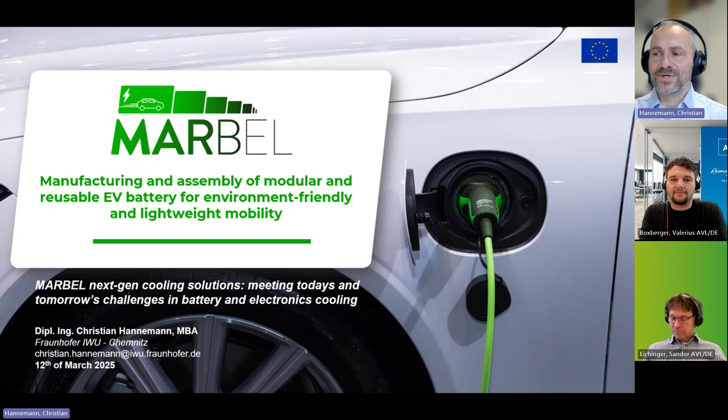Okay, Christian, let's start. Yeah, so we're heading off to the first presentation. It's about the next generation cooling solutions, meeting today's and tomorrow's challenges in battery and electronics cooling.

Just to give you a short impression about what we are going to see. First of all, we talk a little bit about the project itself, about MARBEL, the consortium, challenges, some objectives and impact, then some actual achievements, so all the achievements we have done so far, the next events, and some special challenges that appeared during the project period.

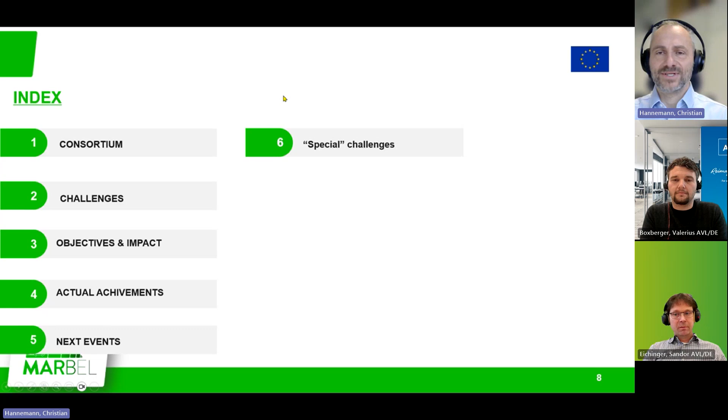So starting with an overview about MARBEL, I hope that is working. We've got a small video, so that you don't...

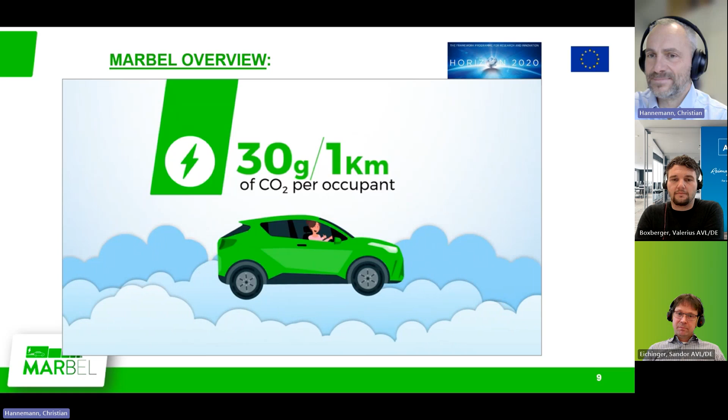The transport sector is the largest contributor to the EU greenhouse gas emissions, road transport being accountable for over 70%. According to the European Environment Agency, passenger vehicles can emit up to 182 grams of CO2 per occupant per kilometer, which can be cut to just 30 grams with the adoption of electric vehicles.

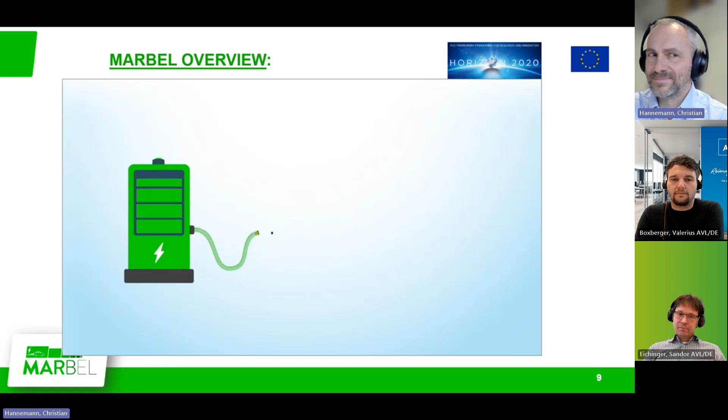To reduce transport emissions in line with the European Union's climate neutrality objectives, the MARBEL project is designing and developing innovative and competitive batteries with a reduced charging time by 25%, and a lifespan of 300,000 kilometers, almost doubling the life of current batteries.

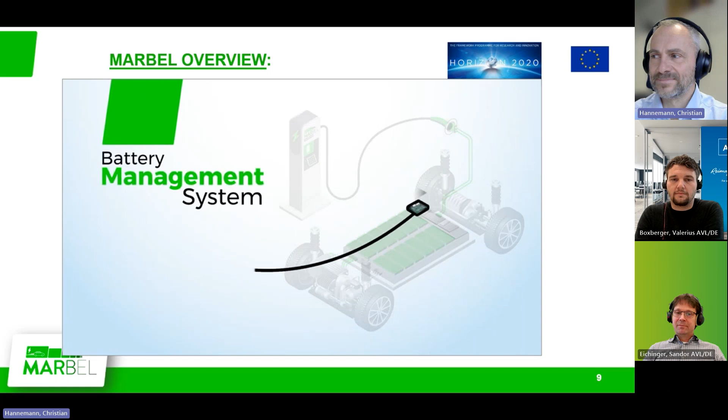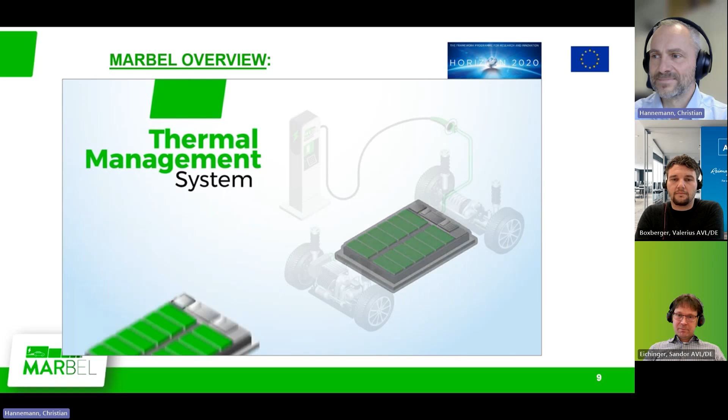The battery pack being developed includes an advanced battery management system, power electronic components, a thermal system to maintain cells at their ideal working temperature through a water-cooled battery, and an ultra-fast charging solution.

The batteries have an innovative design, the presence of recycled materials, and include circular economy approaches, ensuring that they are easy to dismantle, refurbish and repurpose for second life applications, all to reduce batteries' environmental impact and vehicle weight up to 20%. MARBEL, towards an environment-friendly and lightweight mobility.

This project has received funding from the European Union's Horizon 2020 Research and Innovation Programme.

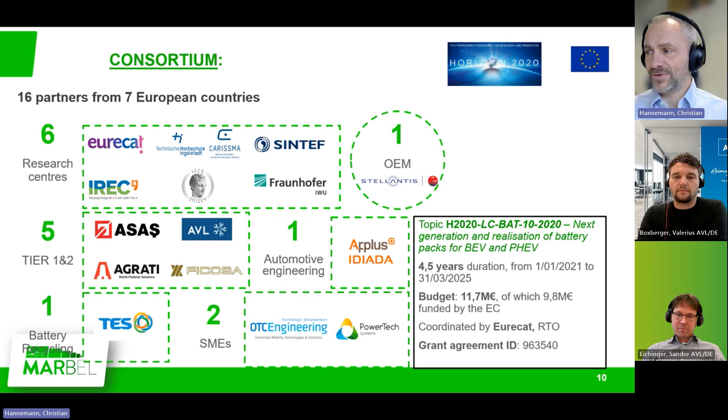Who is presenting today. We have 1 battery recycling company, 2 SMEs, 1 automotive engineering supplier, and 1 OEM, which is Stellantis. The project had a duration of 4.5 years, ending on the end of this month. It was led by Eurecat and had an overall budget of about 12 million euro. Yeah, it was funded by the Horizon 2020 EU funding.

And what are the challenges of this project?

What we have to do is accelerate the mass market of the BEV, and all electric vehicles, to get a more sustainable and efficient vehicle, and contribute to the EU policies meeting the emission targets of 55% by 2030. And how is that done?

Of course, we increase the energy density, reduce the weight of the whole structure of the battery pack, optimize the battery system's performance, extend the range we are allowed to travel, and decrease the charging time, as no one wants to stay on a petrol station very long or on a charging station very long.

We increase the battery lifespan and reduce time and costs as well for manufacturing as for maintenance. And there is a repurpose of second life application, so we're going to use it in other applications like scooters or whatever, and reduce the environmental impact.

Everything you see is compared to the Audi e-tron, which is registered here as well.

So how are the objectives and impact? We have 3 big areas. The first one is the design for circularity. So we are using modular and lightweight design, recycled alloys to create, for instance, the battery boxes. I'll come to that later on again. Weldless modules, also a point I will explain in a future presentation, and wireless communication.

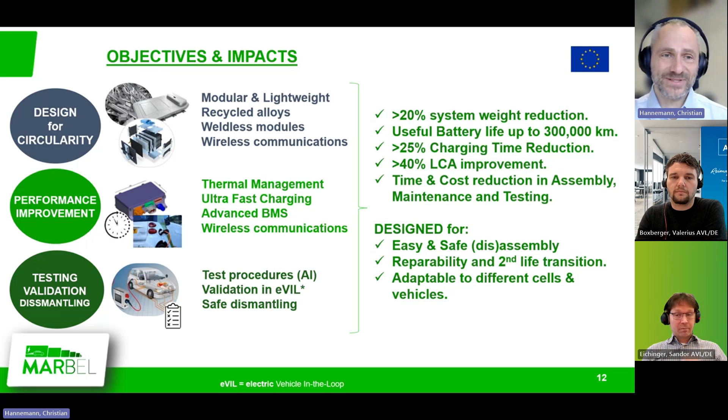And it's all designed for easy and safe assembly and disassembly. It's supposed to be repairable and allows a second life transition, and is adaptable. It is supposed to be adaptable for different cells and vehicles, so we are not connected to a certain OEM or car.

The first point, I explained it already, of those three is the achievement in lightweight design as sustainable housings. Yeah, you see we are using recycled aluminum alloys - I'll come to that later on again. Optimized aluminum extruded profiles I will show, and a modular design, so it's scalable. You can use it for smaller battery sizes and larger ones.

We have in this modular design a safe and easy disassembly and assembly. Most of those solutions use screwing instead of welding or gluing. We haven't got a welded bus bar, it's a screwed bus bar I will show later on, and it's flexible as well. So for easy dismantling, easy to handle.

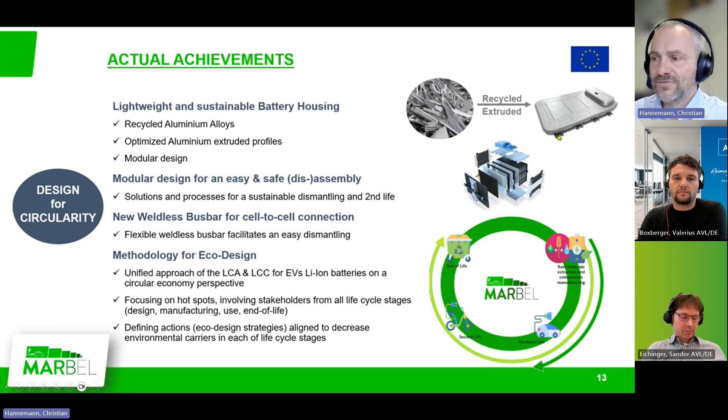And the methodology for eco-design, the approach has a unified approach for LCA and LCC, and the circular economy. It's focusing on the hotspots, involving not only the development, it's also involving all stakeholders from the beginning, so from the design phase, manufacturing, use, and end of life. And of course, there are implemented eco-design strategies as well.

Coming to this second box I showed in the beginning, some achievements have been done in ultra-fast charging strategies and enhanced thermal management. The thermal management is a special lecture we'll show during the whole presentation. So the ultra-fast charging control algorithm is a new one implemented. We take care of preparing the charging station for high power.

So we have a battery switching between 400 and 800 volts. We have demonstrators on both, ensuring the proper energy is coming into our battery pack. Then the enhanced thermal management will be shown in the next presentations - it's supposed to be an efficient cooling panel on top and bottom. And you will see that we use functional aluminum profiles for that, which have a mechanical job and include functionality of thermal management as well.

Also, we investigated some application of aluminum foam. In this case, I will explain why the foam in the end didn't appear in the final demonstrator, but that's also in a future presentation.

And in the battery management system, which is, I would say, the foundation for a second life application, we have flexible and modular BMS to adapt to a large variety, so we are not connected to one certain car or one OEM. It's meant to be also for other applications, containing a small cell manager and wireless communication, which reduces the wiring and this way, again, the weight.

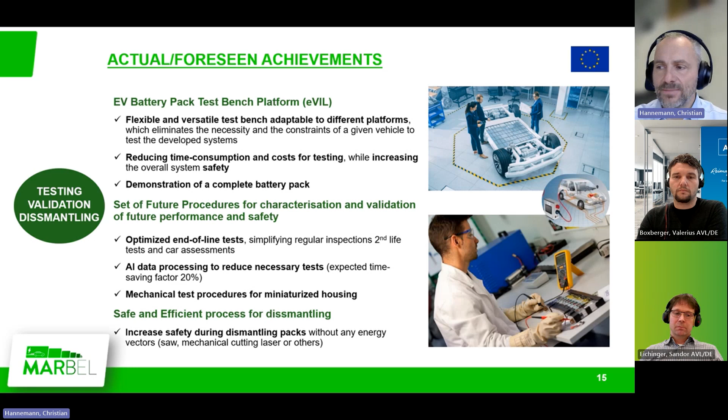In the testing, we have procedures for the characterization and validation of the performance and safety. We optimize the end-of-life tests for the inspection of a second life. The AI data processing reduces necessary tests, saving about 20% of time for those testing. Mechanical test procedures are done on a miniaturized housing. And as I said, for dismantling, we increase the safety during dismantling of packs without energy needed for sawing, mechanical cutting, laser, or others.

As I said, at the end of this month, the project will finally end.

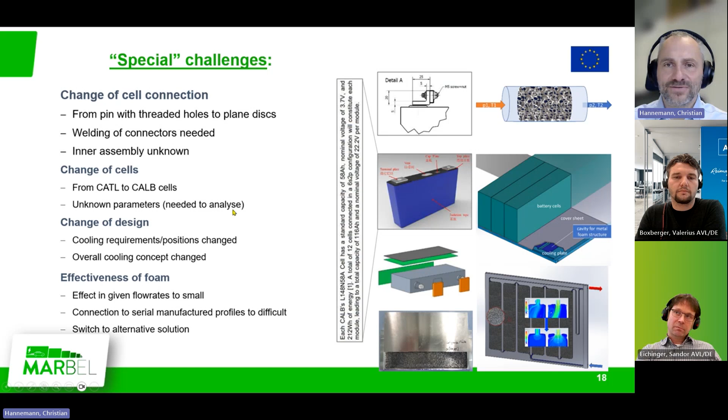I will show that later on, but you see on the right side already some different approaches. The first one was a cooling panel underneath the battery cells, and even in between those cells, there were cooling panels placed in the original design. Later on, with the new cells, there was not enough space for that, so we had to find other solutions. We changed the design and switched to an alternative solution. A new challenge, but we overcame those obstacles as well.

What do we need all those approaches for? The problem at the moment in electromobility and also in other electric systems is that the electrical power density of those systems is increasing. So we get more and more hotspots in the systems, and we have always limited space. We need new cooling solutions, as those cooling solutions actually limit what is possible to achieve, and therefore limit the maximum range and charging speed in electromobility.

And some of those further investigations will be shown in the next lectures, along with a brief mention of the combination of 4 EU-funded projects. The cluster COLLABAT, containing 4 projects working in battery development, includes Helios, Albatros, Liberty, and MARBEL.

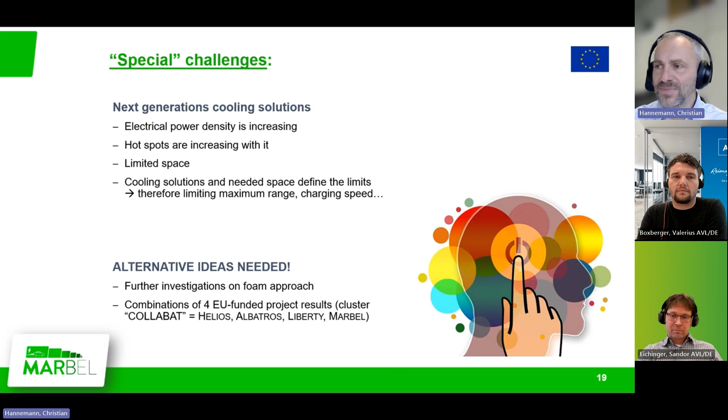So much for the introduction, I would hand over to Valerius. You show the slides on your own, or Sandor is showing the slides? Please share it from your side, we recognize the videos run a bit smoother this way. Yeah, I will, so it's your turn. I will share them. Okay, we see the slides.

Looks good. Everything we are showing now has a perspective of the thermal or the battery cooling system. I would like to start with a brief introduction about the objectives, not for the overall project, but especially for the battery cooling.

We had a lot of objectives, starting with the first one: to get a technical readiness level of about 7 to 8, so to have a demonstrator capable of letting the battery operate in certain required conditions.

With our focus, as the name already says, this is a highly integrated system, meaning we try to use materials or components and give them 2 functions. In this case, as Sandor will show later, we use structural aluminum profiles for mechanical aspects, to carry the battery and provide stiffness of the system, and also to use it for cooling application.

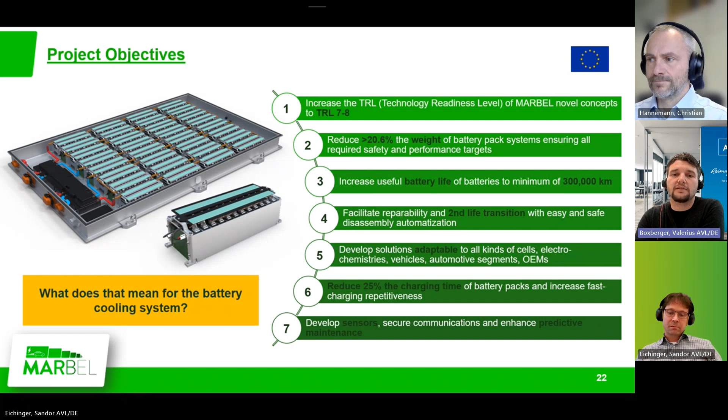Due to the change of cells, we really started from scratch, and there was a feasibility study, more details later. We investigated different kinds of cooling to properly design a system custom made just for this CALP cell, and this led us to two-sided cooling: there is the bottom cooling and the top cooling.

We focused more or less on these requirements, which we set up to have a maximum exhaust heat of 10 kilowatts at a cooling temperature of 60 degrees. We had a heat-up time of 15 minutes from 35 C to 60 C, and a cool-down at the same temperature level, from 60 C to 35, also for 15 minutes. We also wanted a limit on the pressure drop of the overall pressure system, to decrease the energy consumption of the pumps in the system.

Very important, especially for battery health, is to achieve at least the limits and ranges for the temperature spread within the cell, within the module, and also in the pack, which are mostly relevant for battery health and lifespan.

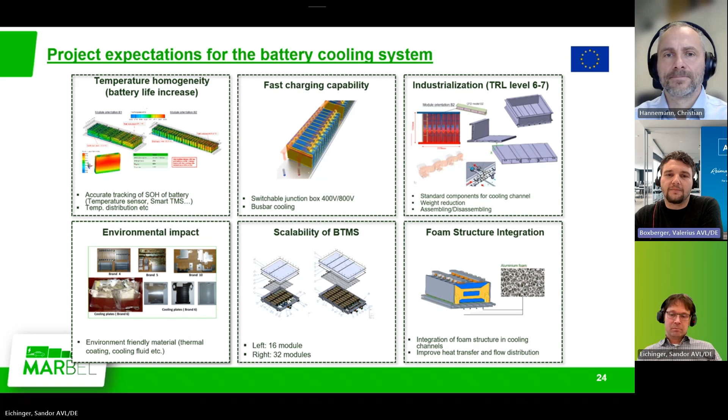Now I'm forwarding to Sandor, and Sandor will introduce in very deep detail the final outcome and the desired thermal battery cooling system.

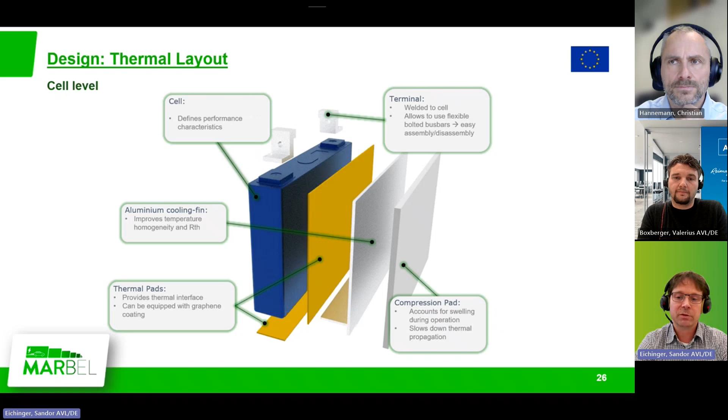And as a last part of the cell unit, we have a compression pad, which accounts for the swelling, and additionally it might slow down thermal propagation in case of thermal hazard. This small video shows the sequence of how it is assembled.

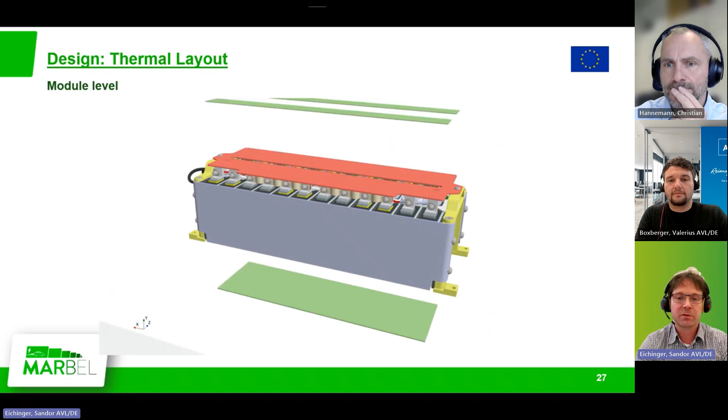On the next slide, I can go to the module level, also a bit animated. So the module consists of 12 cells, and then we apply a bottom profile, as already mentioned, which is filled with the coolant. There is a thermal pad which provides the connection. And we also have a top cooling rail which is responsible for eliminating the hotspots due to the bus bars.

Because during cycling or during fast charging, you can have quite hot bus bars on the top of the module, which then introduce again temperature inhomogeneity for the cell, and we wanted to eliminate that.

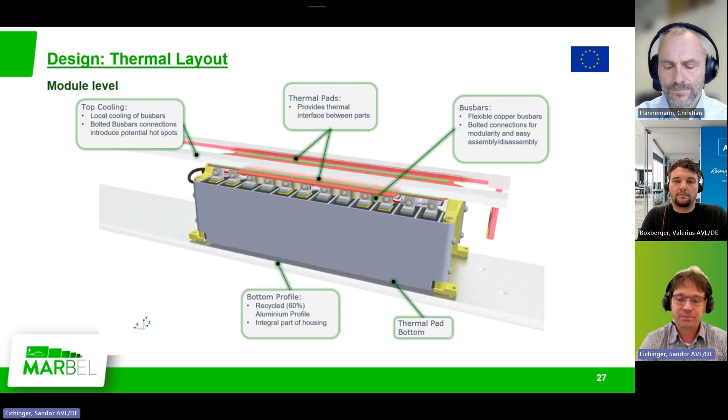In order to do that, we have a top cooling rail connected with thermal pads. In this picture, you can also see our CAD picture of the flexible bus bars, which are bolted to the cells. So this is our module, let's say.

As the next level, we have the pack. I'm showing now the big one with the 32 modules, so we have practically 8 rows with 4 modules, and we have a cooling distributor on one side of the pack, which is also very simply made because it's just simple piping. We have to ensure, of course, the flow distribution is even in each parallel row.

So we introduced some throttles in the piping, which was developed with the help of simulation and later on checked with physical testing in order to verify the diameters we derived. In that way we ensure that each parallel row has the same volume flow, and the only temperature difference we get is due to the fact that the modules are in series, so the module at the rear sees a higher coolant temperature. We checked this in simulation, and I will show it later. We are still below our targets regarding temperature differences.

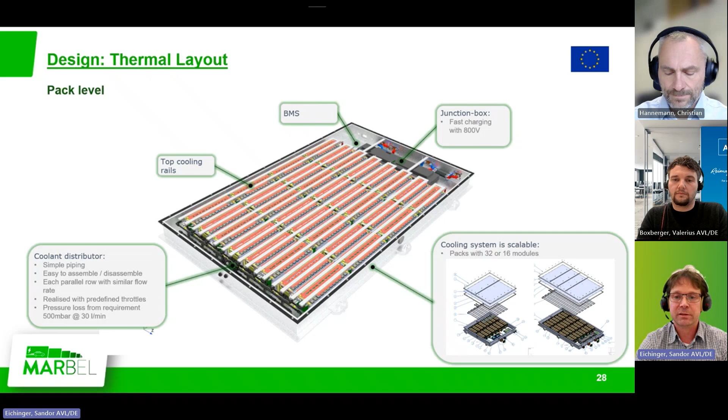The cooling system is also capable of cooling the power electronics, as you can see on the rear side of the pack, including the junction box, which is responsible for switching between 800 and 400 volts on the big pack.

For the cooling development, I'm showing now the position of the throttles and the volume flow distribution, which we determined with the help of simulation tools. You can see here the positioning of the throttles inside the system, and this development was also part of the project. In the next section I'm going to explain how we developed this, and now I'm just trying to summarize it for this part.

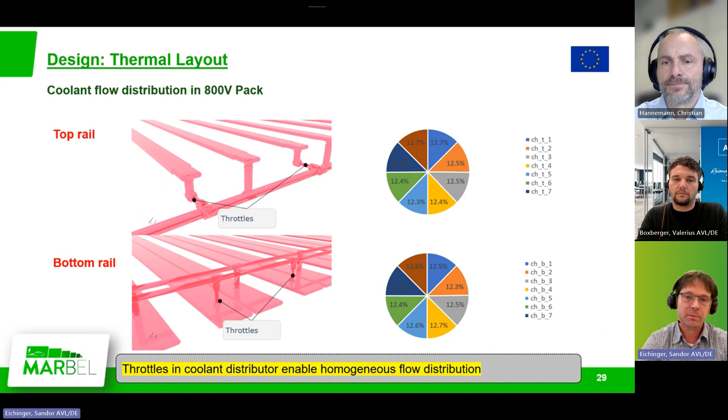Now I'm going to explain a little bit the intersection between hardware and software, because in this project we are also developing a battery thermal management system. This is a control logic responsible for the cooling and the strategy.

For that we need thermal sensors, and we position them in a smart way because we did simulations and we have seen where the hotspot of the cell is during fast charging or a charging cycle. We equipped the module with many thermocouples, so every cell has a thermocouple, and this information is then provided to the BMS, and at the end the BMS provides this to the BTMS.

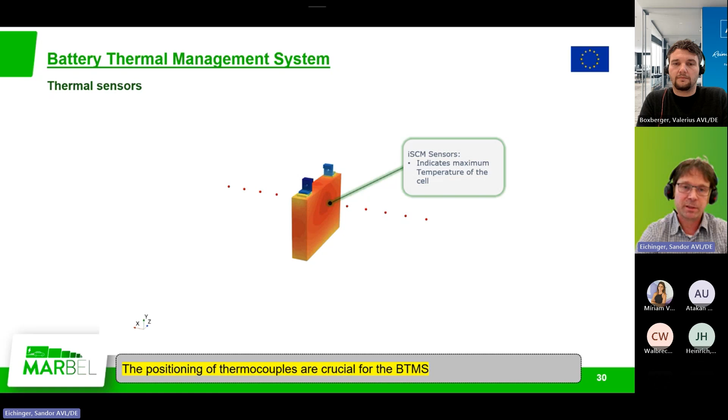So we can develop our strategy for the cooling based on that information. Another, let's say, very simple explanation of our BTMS strategy: we have the hardware on the left hand side, we have the BMS, and the BMS at the end provides information about the actual current and the temperature vector to the BTMS, and some other information which is not listed here but I have a slide for in this presentation. All this information is then processed in the BTMS, and the BTMS provides a target volume flow and a target inlet temperature for the coolant which should come into the cooling package.

In this project we don't have a vehicle, so we were planning to do it with a conditioning unit in a test bench. This conditioning unit can provide whatever temperature and volume flow, and this is also information for the BTMS, so this kind of hysteresis can be considered.

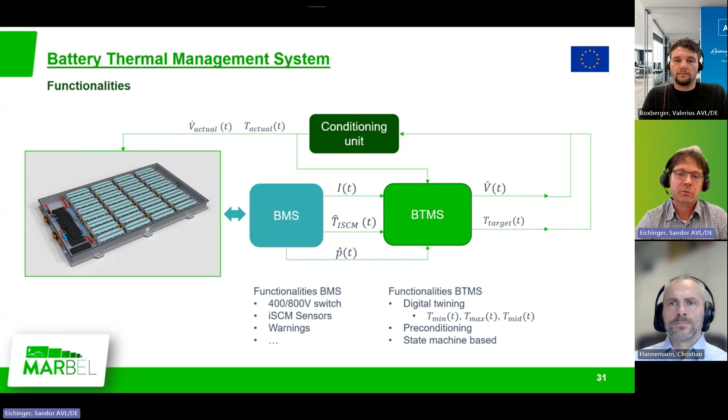On the other hand, the BTMS is just a state machine based algorithm, so not exactly state of the art, but also capable of preconditioning. In this project, though, we didn't have the possibility to develop preconditioning models. It's just that the BTMS has a different approach accordingly if we know we are in a preconditioning state, but providing that information of when we are in preconditioning would be the scope of a different project.

With that, I can try to summarize at least the definition of the cooling system layout, the achievements we tried to reach, based on the previously explained challenges, requirements and targets of the project. So we have a cooling system which has good temperature homogeneity, which I will show in the second part, and the thermal resistance is also close to the target.

We successfully implemented the cooling system, which is easy to assemble and disassemble using bolted connections for the bus bars. It's very simple piping with a modular approach, which was previously defined. The system is scalable for bigger and smaller packs. We have smartly placed sensors as well as a control algorithm for the thermal management system, which is also capable of digital twinning and preconditioning if needed. So with this, I'm done with the description of the cooling system layout. If you have questions, write them in the chat.

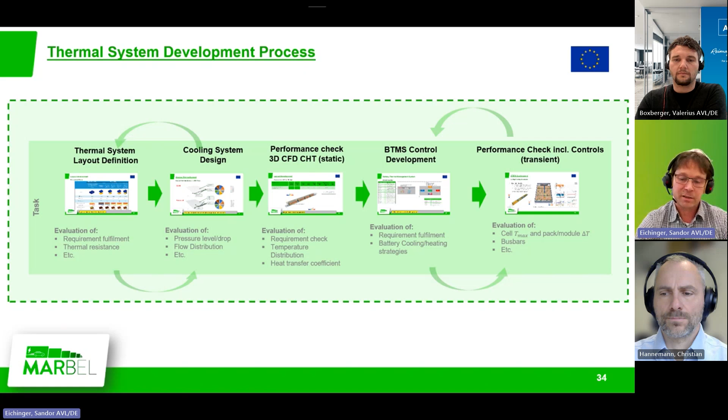Now I'm talking about the layout definition phase, the first small rectangle. As I said, we were considering different concepts and studying them in more detail. As you can see on the right-hand side, there's a small summary of different cooling concepts. Not everything is included here, but this is roughly what we investigated.

So immersion cooling, liquid cooling, we had some state-of-the-art where the cooling plate is on the bottom or between the cells with some aluminum fins connected to the bottom, or we have top and bottom cooling as well. We tried out different techniques here.

We also wanted to use at this phase some kind of heat pipe technology, applied between the cells. With the heat pipe, you can have very good heat conduction in a certain temperature range, which would be very good for the thermal system. But during the development process, due to different challenges, some very good techniques can fall out because of the price, environmental friendliness, and other aspects. So this was actually the case here.

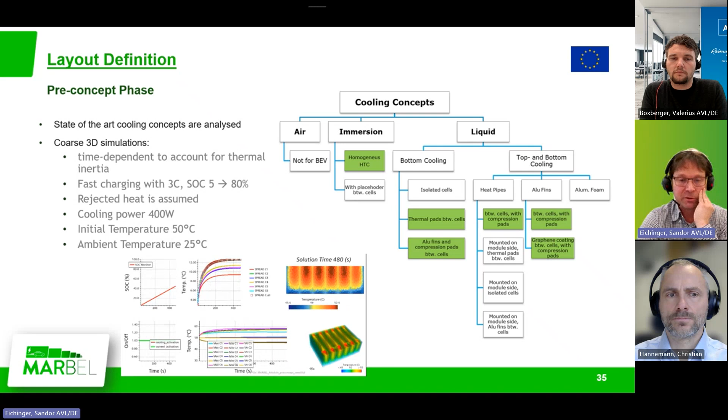So this would be very good, but it would be very expensive—problematic from many aspects. So at the end, we have already a quite good solution with aluminum fins between the cells, and that's a good introduction to the next slide.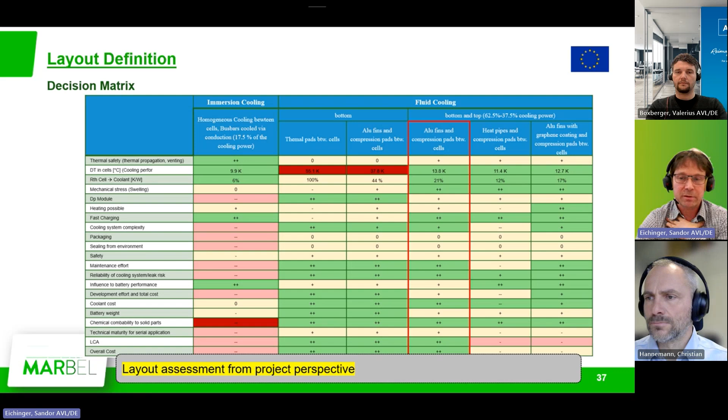But of course, the next step, as I said, is an iterative process. We also consider the complete pack. The flow distribution has to be considered, because as you go from cell level to module level and then to the pack level, you have to develop the corresponding parts. We did it in a simple manner, using different diameters for the different rows introduced in the cooling distributor.

Which then at the end results in a quite even flow distribution, and also the pressure loss fulfills our targets and requirements. So in this very simple manner, we can ensure that the temperature homogeneity in the pack is okay.

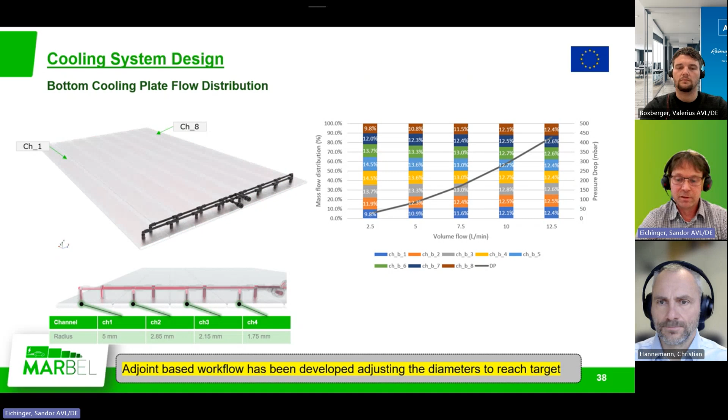And for that, I mentioned that we developed, for example, an automatic adjoint-based method to derive these diameters. This is also an interesting method we tried out in this project, and it was a successful method to find those diameters instead of a manual trial and error method.

Okay, then I'm going to switch now to the performance check. That was more or less the third rectangle in the process. This is again a very detailed 3D simulation with fluid and solid considered, but it's still based on some assumptions. We tried to use a load case which represents a kind of worst case, so we have a heat rejection in the cell.

At this phase, maybe we already have some information from cell characterization. We can have some assumption about the rejected heat in the cell, and we took something like a middle value during fast charging, about 10 watts. We also considered ohmic heating of the bus bars, and in the simulation tool you can model it, including thermal resistances due to bolted connections and electrical resistances as well. All these things give you a very accurate representation of the temperature field.

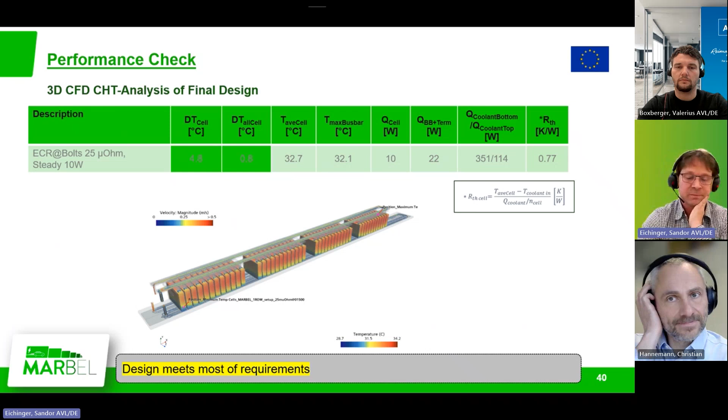So we were satisfied with this, and then we go to the next rectangle, which is the development of the BTMS. As mentioned in the previous presentation, we have some inputs from the battery. Through the BMS, we get temperature vectors, electricity, and so on. I made a complete list of the input signals and output signals of our BTMS. I'm not going to explain all of that, but I want to mention that we have many different variables which define the state of the battery.

We use the coolant inlet temperature, the actual coolant inlet temperature, also as an input. This accounts for the hysteresis due to the conditioning unit, or in case of a vehicle, where your thermal management system doesn't always provide exactly what you want. On the right hand side, you have the target volume flow and also the target temperature, and we also have a heating request in case of heating up the battery.

So this is the input and output description of the BTMS at this stage, and this enables a safe and more or less effective operation.

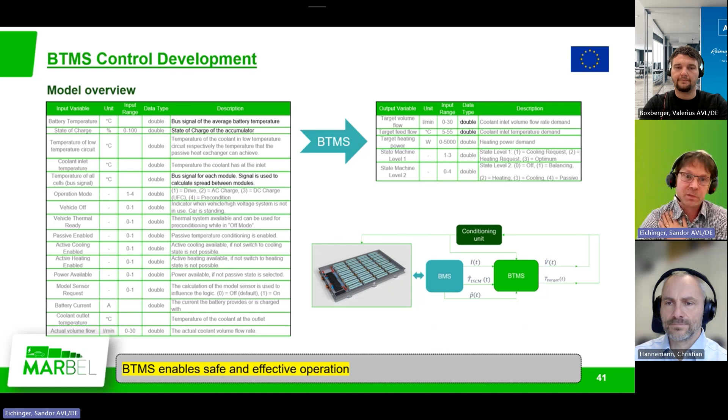As I said, the last rectangle in that development process was this one, with a high fidelity simulation with performance check.

So this is, let's say, a complex battery simulation with a cell model which is based on some electrochemical model. We integrated this into our simulation tool with the help of FMUs. An FMU is a workaround to do co-simulations between different systems, so our 3D simulation can communicate in that way with a

P2D electrochemical cell model. We did the same with the BTMS, as you have seen before, that our BTMS can also be exported as an FMU, and then in the simulation it's easy to implement everything and put it together, and we can have a complete simulation.

And I think, maybe let me add one information: it's an advantage that we are able to also use control functions from the 1D model, the BMS function, and integrate it into our overall simulation.

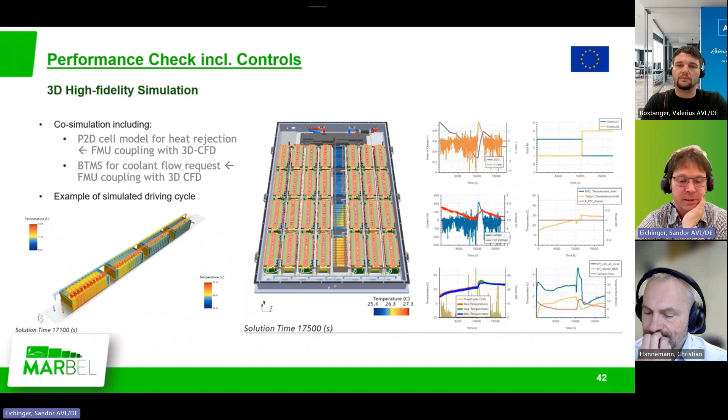Yes, I wanted to explain the next slide as well, how we used this kind of simulation to improve our BTMS, because it was a part. We used this high fidelity simulation in order to train our very simple model, which then provides us the temperatures in different locations.

And also it's possible to define local minimum and maximum. As an example, you can see a driving cycle on the left-hand side, which consists of intensive driving and some charging. So you start with a full battery, you drive it empty on the highway, and then

you just, let's say, charge it again. And for that, what we did is we took only one sensor of the complete module, and we can train the model, and it is able to provide us, for example, a temperature value on the bottom of the cells.

straight line is the simulated value from the 3D model, and the dotted line is from the fast running model, and they are quite well capturing each other. The agreement is quite good. The same applies for the middle temperature.

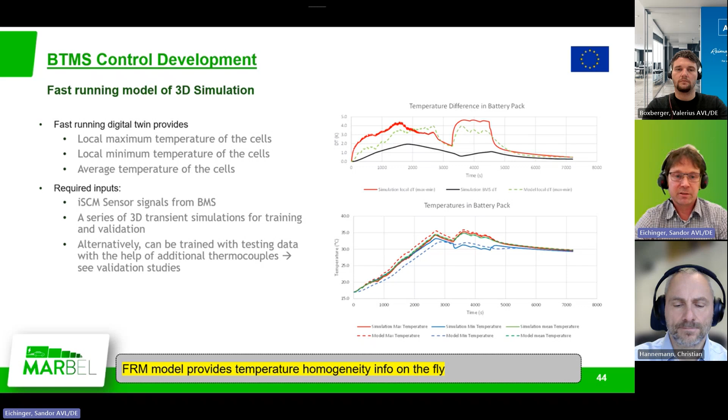So this is more or less my presentation. The last slide is a summary. We applied the virtual development process with very few validation studies, and we tried to overcome the project challenges with more or less success. We developed the BTMS control algorithm, which is capable of digital twinning on the fly.

There are still some points it would be nice to continue in a longer project period. It should be done at some point: an extensive validation of the BTMS with measurement results, which is being produced right now at some other institute, maybe at this very moment. The last point was also already mentioned before.

If you want more information about the MARBEL project and the battery pack in a more holistic manner, it's strongly recommended to join our final event. So with that, I'm done.

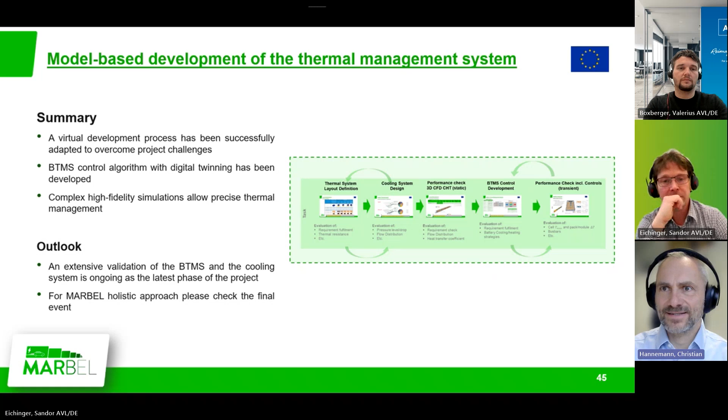Right. So I think that is your sharing, and I'm switching to the next part. I hope you can see the slide. We come to the next point. As I said, we are a bit ahead of schedule, and we will skip the coffee break. I hope it's not that boring - the next lecture is not that boring that you'd jump over and go to the coffee break anyway.

I'm talking about the industrialization of battery systems from development to mass production. There are just certain points I can show here, because it's a long step, and industrialization is a point you always look at for the future. But we are developing a new battery system, so we are not yet on industrial scale, and we are definitely aware of that. We have a TRL level that is supposed to be between 6 and 7, and we will stick to that, not coming to the final version of an OEM application.

So the talk is separated into some approaches. I want to show something about the material, the processing, and other approaches that might not have come into the system yet. Starting with a slide you might remember from the first presentation.

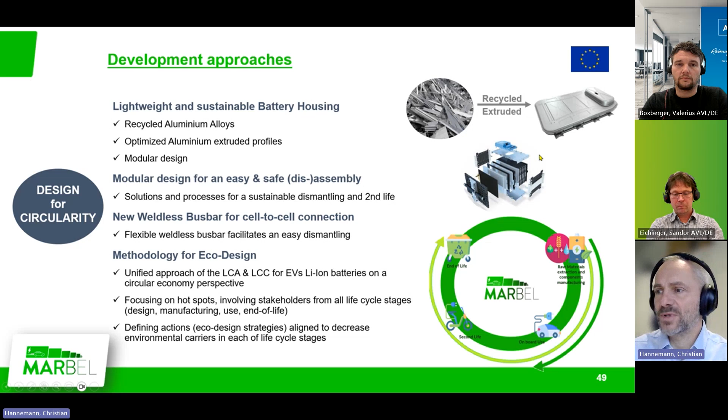By this modularity, there's nothing glued or welded. And you heard already, we avoided the immersion cooling in the end, because it's supposed to be repairable and easy and safe for assembly and disassembly. All those points have been mentioned already, so I'll go a bit deeper in detail.

For the material side of the battery housing, we used an aluminum housing realized by extruded profiles. The material was post-consumer scrap - you see on the left - and it had to be collected, shredded, identified by, for instance, LIBS, and in the end molten into the first ingots. Those were cast and remolten, chill cast into extrusion billets, and finally extruded. In the end, if you want a certain structure, it might be deformed as well.

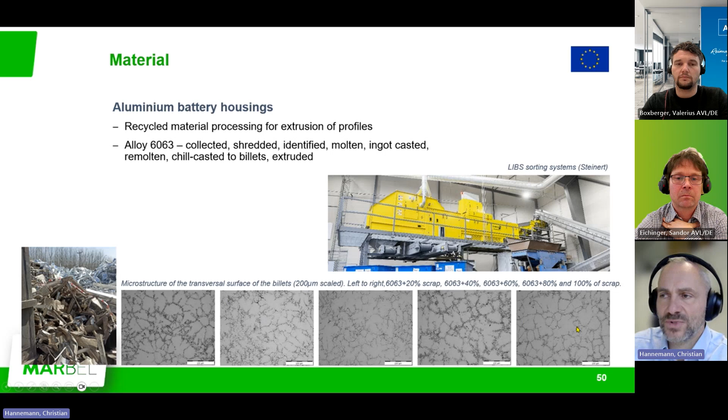On the lower side of the slide, you see some microstructures with different contents of scrap, combined with virgin material of 6063 alloy. We started with 20% scrap and increased it step by step up to 100%. The results showed that extrudability remained - it was extrudable in all ways.

In series manufacturing, you're dealing with much more material. If we had recognized early on that the scrap content wasn't working out the right way, we could have skipped that and improved it at laboratory scale beforehand. Coming to this large scale...

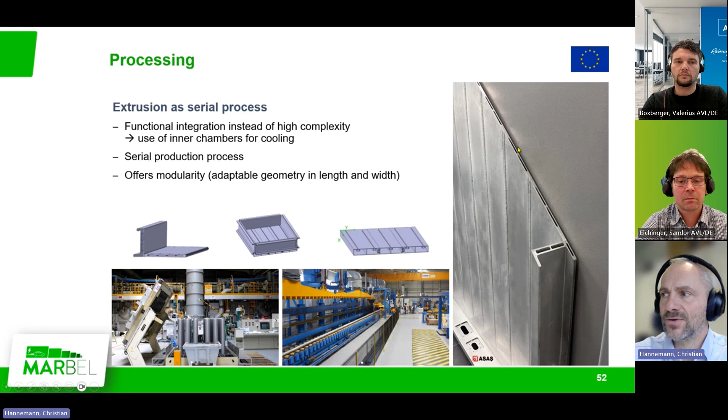That's about the assembly. A prototypical assembly usually is connected with manual welding. In our case, we established automated welding by robots. You see the battery box, we have some weld beads on the side walls, and of course we have to interconnect all the floor panels as well.

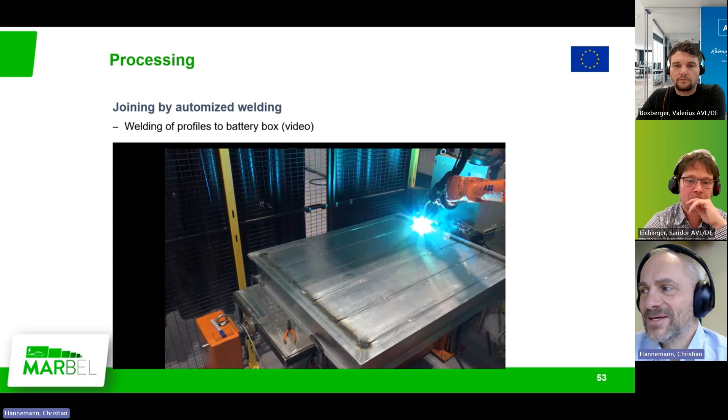This way also creates parallel cooling of the battery cells. In the lower right corner there's monitoring of the welding process, continuously supervised, and you see the weld beads look very homogeneous and nice. Now the people have to speed up a bit, and sometimes you see welding of only part of the weld bead's overall length. That's the strategy to avoid tensions during the assembling process.

So now the inside is actually welded, and it has to be a sealed system in the end - in one case because of the cooling, and in the other case to protect it from environmental influences.

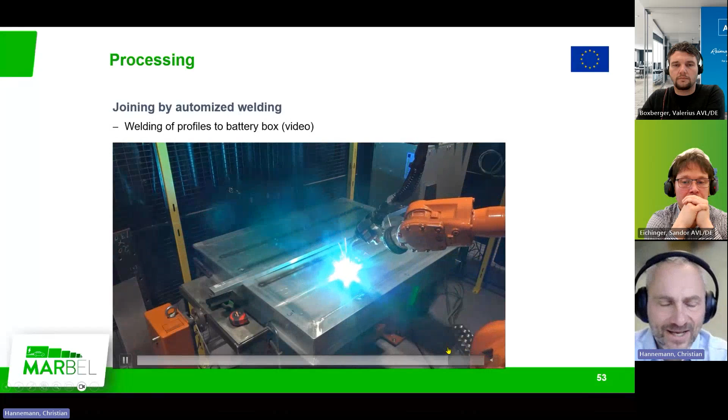I'm going to speed that up a bit. Again you see the melt bath of the welding process and the supervision of that. If you have further questions, I'm sure the colleagues and project partners from SINTEF in Norway are happy to answer your questions if you join the final presentation at the final event next week.

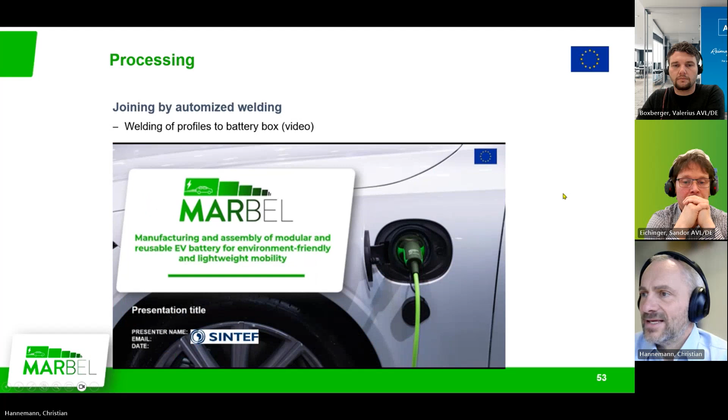We have already seen some slides and videos or animations of the assembling process, and this is a process I found rather interesting as well. For me it was the first time that I actually attended such an assembling process. To give you an impression of how it looks, here's a video of the assembling process realized by AVL Italy. Antonio is explaining it.

Is the voice working? No, no sound. One second. I will just shortly unshare my screen and share again. So jump back a little bit. And we try it again. Now working? No. That's strange, it should work. So maybe one of you is able to explain a little bit about it?

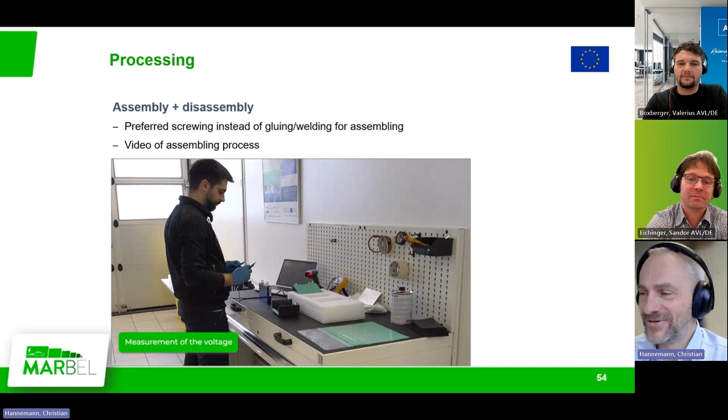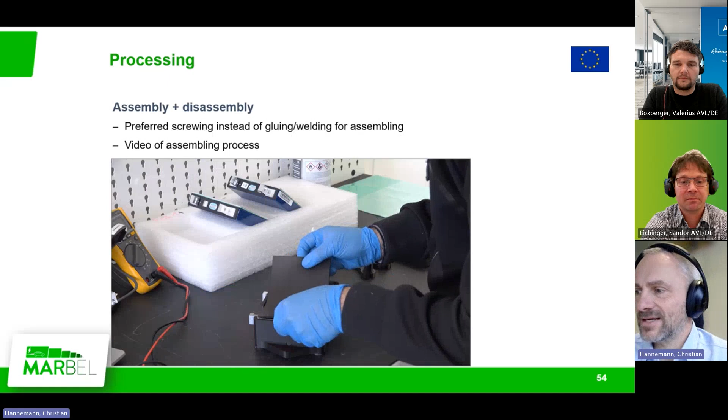In the end, most of it is already shown in the pictures, so if I say anything wrong just let me know. First of all, the preparation of the cells. Here you see the thermal pads adapted to the cell, the compression pads, and the sensors for the thermal parameters. We had a question about this in the chat before - the material is shown. Now 6 cells are actually already assembled.

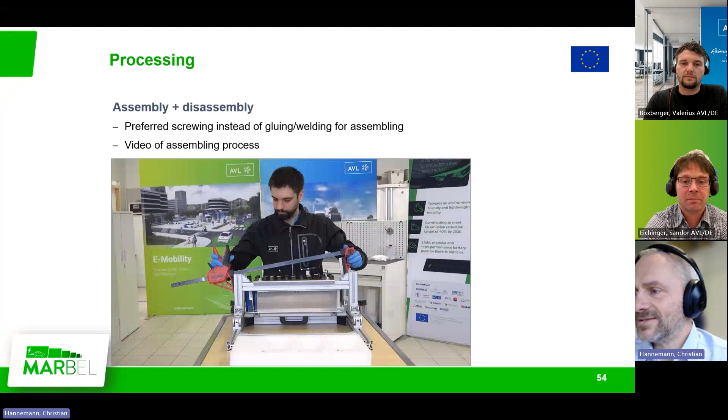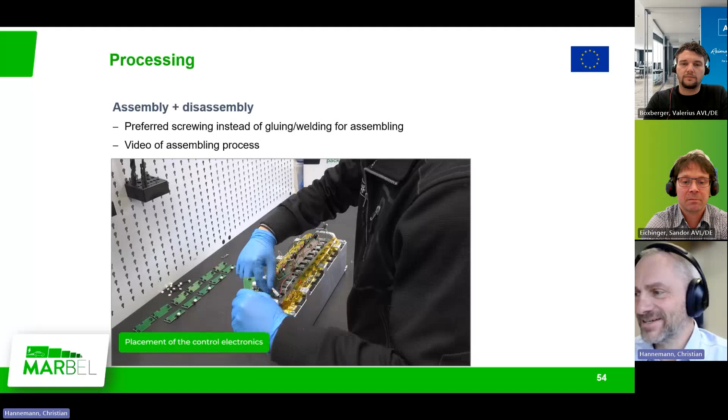You see the thermal guide sheets, or the transmission of them. The compression you have seen just for a short moment, and now we have the interconnection of all the electric and sensor system.

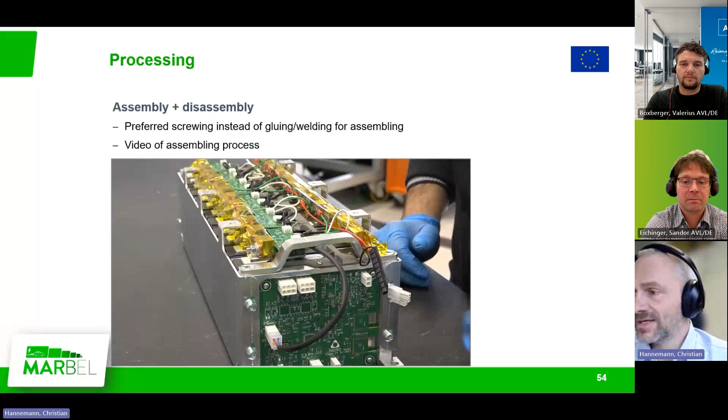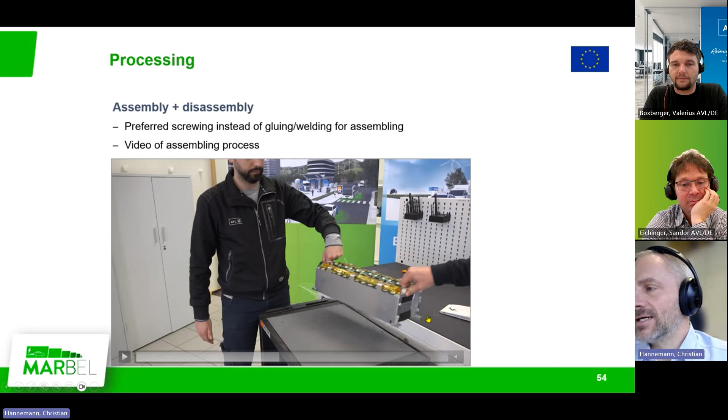As you will maybe notice, there is no welding on module level. The busbar connections are bolted or screwed, so you can quickly and easily disassemble everything. The module size was also designed to not be too heavy, to be liftable by people - you see them handling the whole module with just one hand, so it's not that heavy. All the additional parts added to the cell are meant to be lightweight design as well, taking into account a low overall weight.

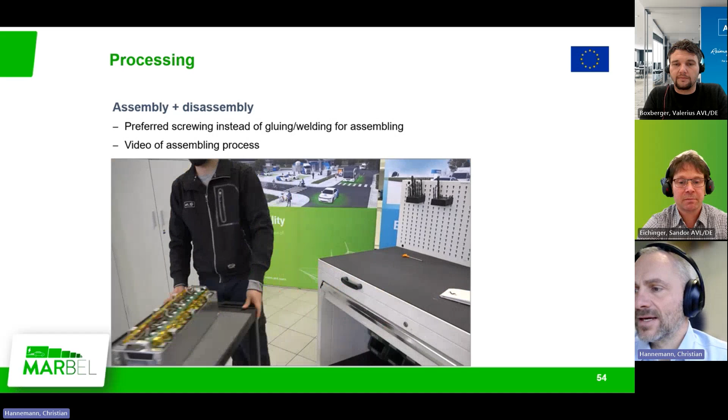Now you see the module will be assembled into the battery box. Here you have a pressure test, a tightness test, and you see the profiles - you just drill holes and put in connections for the coolant piping.

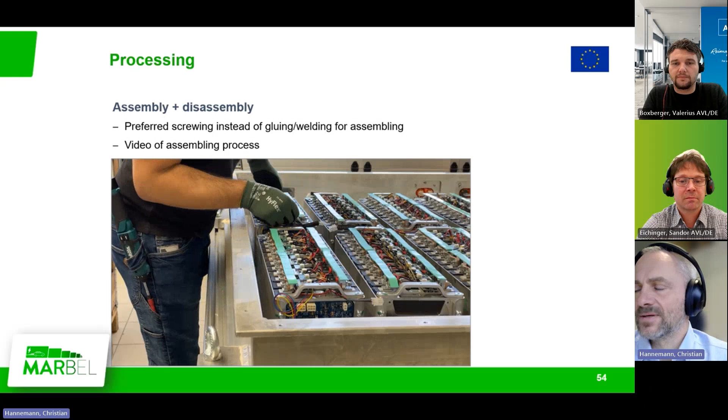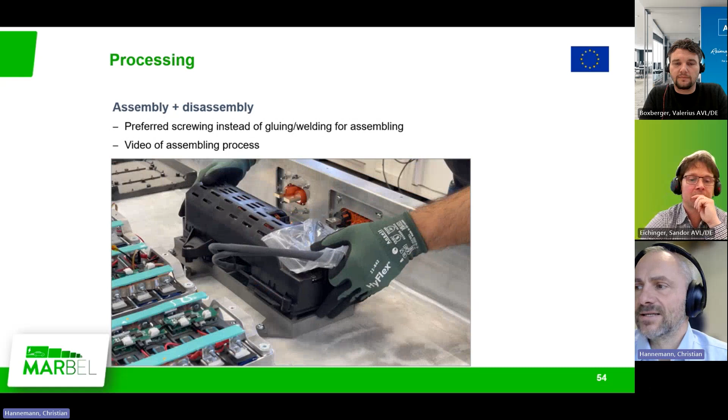Now all the modules are assembled. You see already the thermal pads on there, the interconnections by busbars are established, then there's the cover and the placing of the junction box and controlling.

Sorry that this is not working, but I have no explanation for that. And the cover on top - as you have seen again, no welding, no gluing, only screwing and disassemblable connections.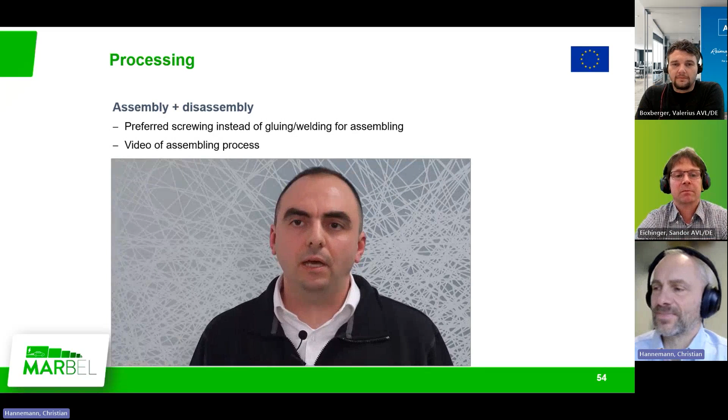I told you I would talk a little bit about eliminated approaches as well. We have already seen the area I come from, the metal foam part. The original idea was to increase the surface for heat transition and for the cooling process, with the intention to use pipings or cooling panels in which a liquid flows through the panel, with surface enlargement by a metal foam.

And as we talk about foams, what is it all about? That's Mr. Kelvin - he was actually the first one who investigated this kind of porosity or cells within foamed structures. I'm always talking about closed and open cellular foams.

The first one, the closed cellular foam, I showed shortly in the camera. That's actually a foam with a density of 0.25 gram per cubic centimeter. It's made of aluminum, and as you can see in the middle picture, it's easily swimming. We use it very often for crash performance and also for lightweight design solutions, and it's also realized in some battery housings already, mainly for those crash purposes, for the pole test or similar.

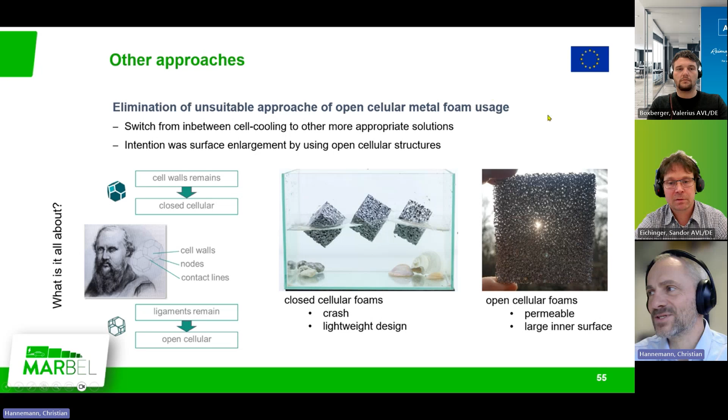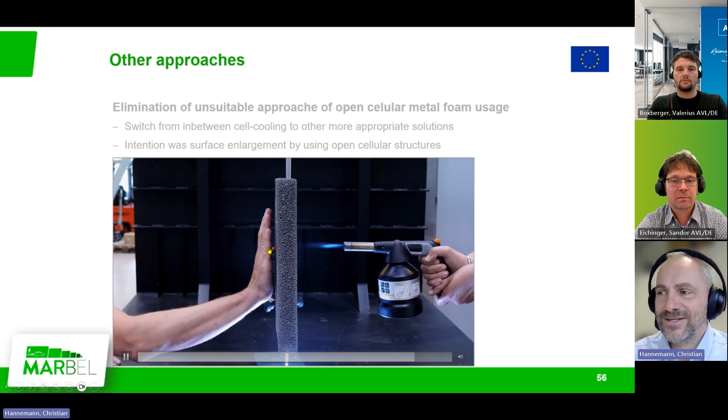Just to show you the behavior of the foam, that it is transferring heat very well: this is my hand on the left side, and the colleague is trying to, I would say, burn me, but there is a plate of open cellular foam in between, made of aluminum. You can see the flame would almost touch me. This flame has a temperature on the core of about 1,300 degrees. It's no time lapse or anything. It's really working, that there is no heat coming through this panel, as all the heat of this gas flame is actually distributed within the structure of the open cellular foam.

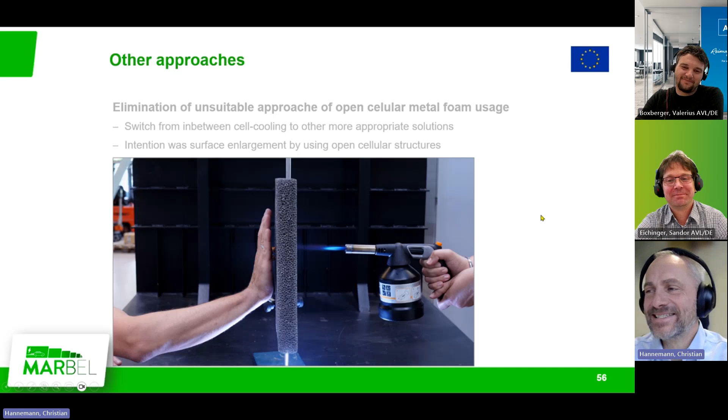And please prove it by showing your hand again. Yeah, it's still unhurt. The colleague was very hesitant and nervous, but it worked out well.

There are some new approaches I want to show you, based on that experience. Usually we have an investment casting of those patterns. The ones I have shown so far, and you have seen in the video, are actually made from a master pattern that is originally a polyurethane foam. And there are alternatives as well. In general, you can have a CAD file of whatever structure you can think of. At the moment, we print it in a 3D printer in wax and use this as a master pattern for a casting process - in this case, aluminum.

As you can see, there are several of those structures - I got them here as well, showing them in the camera. That's a Schwarz P structure. And maybe just to prove that different materials are possible, that's a copper structure as well. So there are many possibilities, and I would say the limit is only your imagination.

We had one approach that is quite interesting to show, I think it's quite a new one. We intended to have an individual cooling that is adapted to the load case of the electric circuit. So you all know those thermographic pictures, coming from a thermographic camera or from a simulation, where you have hotspots on some of the electric components. Usually those hotspots are shown in orange or red color, and cold spots are in blue. And if you combine that with a conventional geometrical structure, creating unit cells, as you see on the right picture...

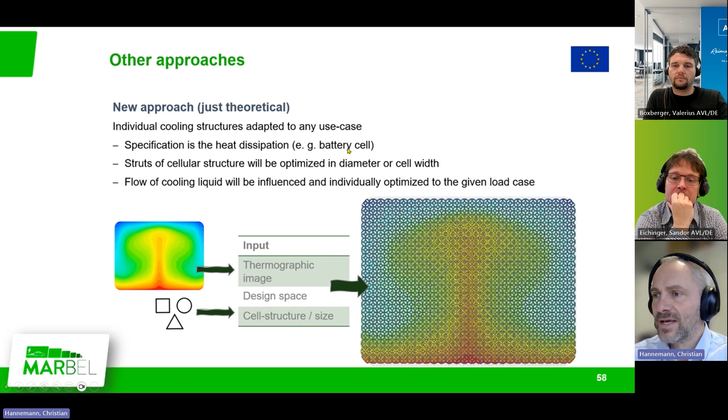You can actually have a process where the diameter of the ligaments, of the struts, is increased, or the cell size is increased. If you look closely, you see that there are thicker ligaments wherever you have a red color on the thermographic picture. In our case, that is actually one of those profiles we have seen from the battery box - you have the inlet, which is shown very nicely in dark blue, so it's cold, it's a cold liquid coming in.

Then it flows within the profile underneath the first four battery cells. You have the way through to the next chamber, coming back, and have the run out on the lower right. And as you can see, the first one is cooled perfectly. The last one is a lot hotter than the first one. If you see, the range of those temperatures is still within the limits.

We have a certain limit of 5 degrees Celsius or 5 Kelvin, but this could be optimized. Our intention was to have an automated process where you take such a picture, put this thermographic or simulation picture in a design process, and just start this sort of automated process of geometry generation. As shown on the lower pictures, we had a network of single cells.

In this case, it's just cylindric pins of the same diameter. By this process, you have automized enlargement of the diameter of those pins, and you will achieve, wherever there's a red color, a thicker pin, and wherever there's a cold color, you have the original small diameter of the pin.

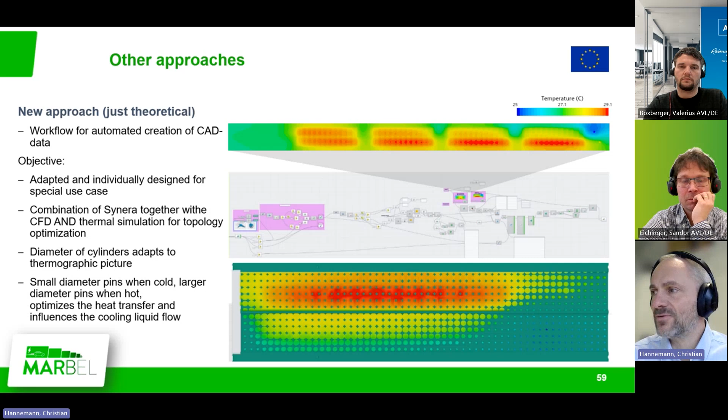This process is actually developed within the project. We have tried it in small scale, but it hasn't been realized in the project, as it was just a theoretical approach, and will be subject for further projects which follow on after this project.

It would be possible to have a soft reaction of a bumper when there's a pedestrian crossing and an accident happens. You would have a soft behavior of the bumper. And as soon as you are driving on the highway, you don't use the soft behavior anymore, and you have a hard behavior of the structure, consuming a lot of energy.

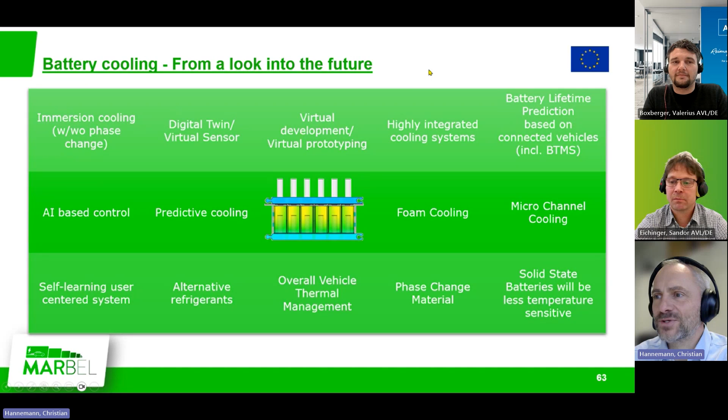Just to give you an impression about the thermal behavior, there are some differences. All 4 projects had different approaches to realize the thermal management or cooling of the battery. The first was immersion cooling. The second was a small bit of immersion cooling combined with spray cooling. Then we had a conventional cooling pad underneath and in between, and our system with integration of the cooling within the housing, combining components, increasing flexibility of the system, decreasing size, and this way also the weight.

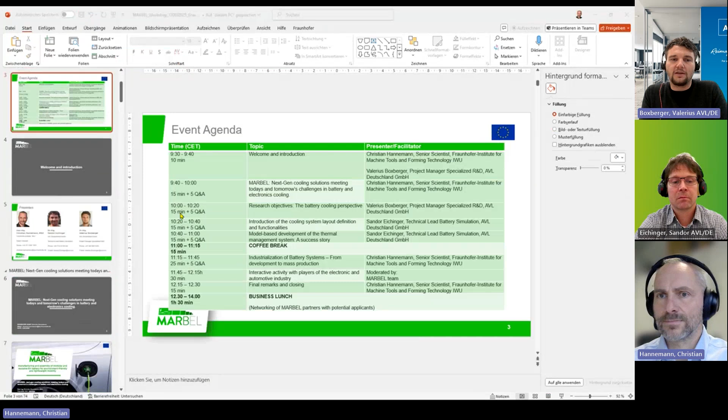So there is a big chance also to use the second life, and the cells will still be possible to use. It will still be possible to provide performance or storage potential for another decade, but a little bit less.

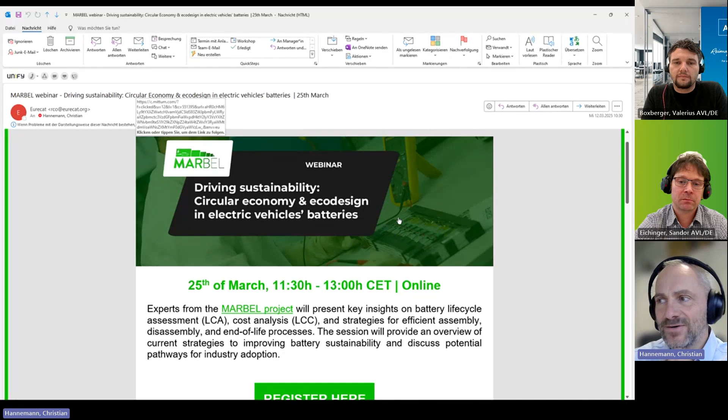One further comment from my side. I mentioned already many times the final event that will happen next week. There's another event - I'm not quite sure if it's possible that you see it right now. You see the mail I'm showing? Yes, there's an event one week after, on the 25th of March, driving sustainability, circular economy and eco-design. It will also be from the MARBEL project, talking about battery life cycle assessment, cost analysis, and so on. When you look in the agenda, you will have environmental aspects, eco-design. So if you have closer questions, especially to the matter Carmen mentioned, it would be good if you would be able to attend this workshop or webinar. They will explain a lot more about those questions.

Any further questions? You're most welcome to jump in.

Tends to be very quiet. Everyone is hungry already.

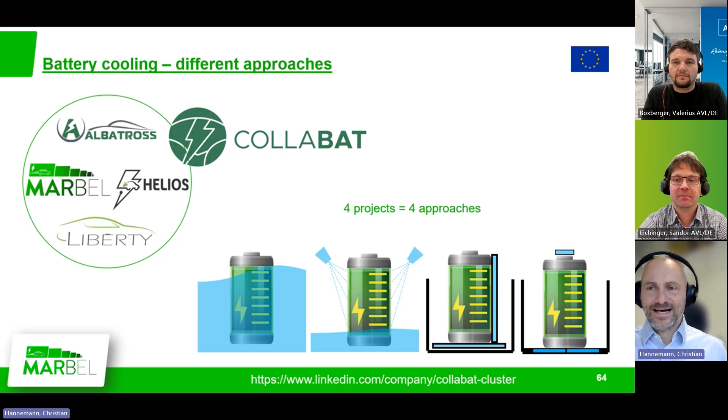As I can't see any hands raised, I would say we're gonna close on that note.